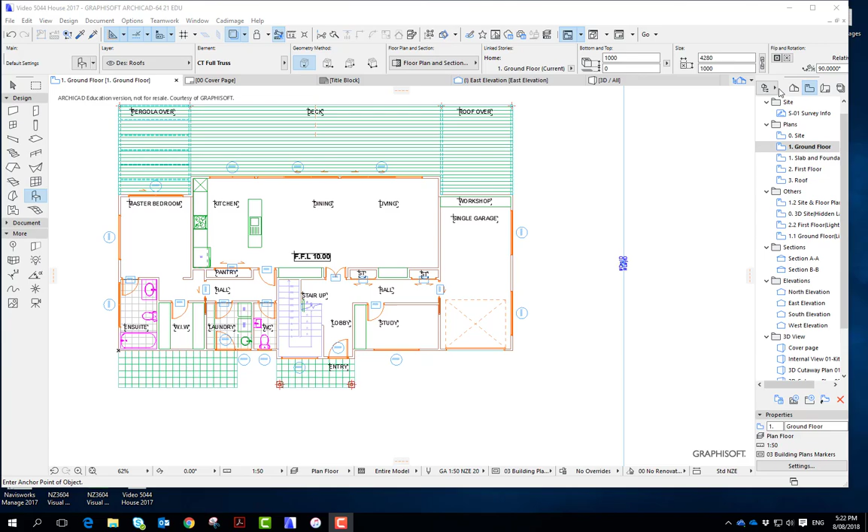So first thing I'm going to do is go up to this project chooser and say show me the organizer. I think this is quite a useful dialog to look at. What's helpful is to put the project map on the left here and go to the views and this one. Now there's already some views in here, so I'm going to just delete them.

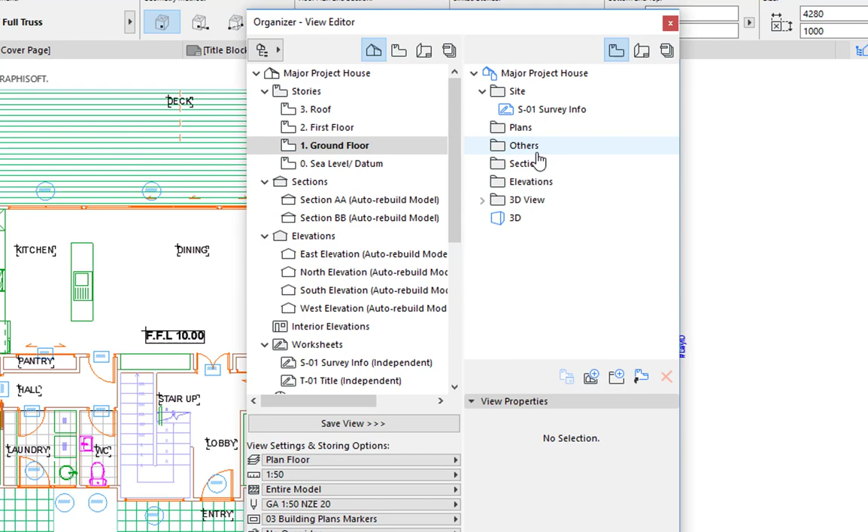As I said to many other students, you're not deleting anything that you've modeled, you're just deleting photocopies or photos that you've taken of the model. So this does not do any harm, and I'm going to do it just to leave a blank template for us to populate with our views.

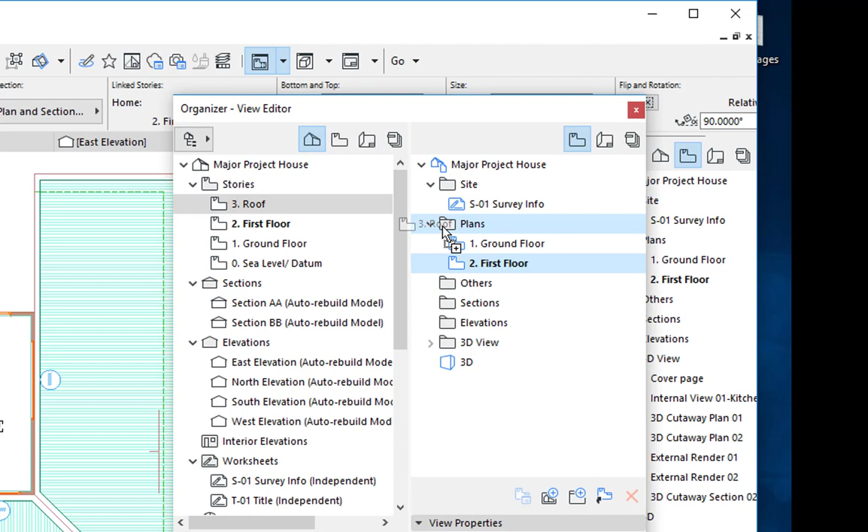So once you've done that, we've got our ground floors, we've got our first floor. You can see this guy has got various things on here, turn the trace reference off, so looks like the drawings are quite good. So I'm just going to grab the ground floor and put it into that plans folder. I'm going to grab the first floor, put it into the plans folder, and you can do the same with the roof and whatever other ones you may have drawn information on.

We've got sections here, so there looks to be some data. Yeah, these are quite good sections, so let's just go and put these into the folder that is allocated. And without checking the elevations, I'm just going to go and do the same thing, put them in this folder.

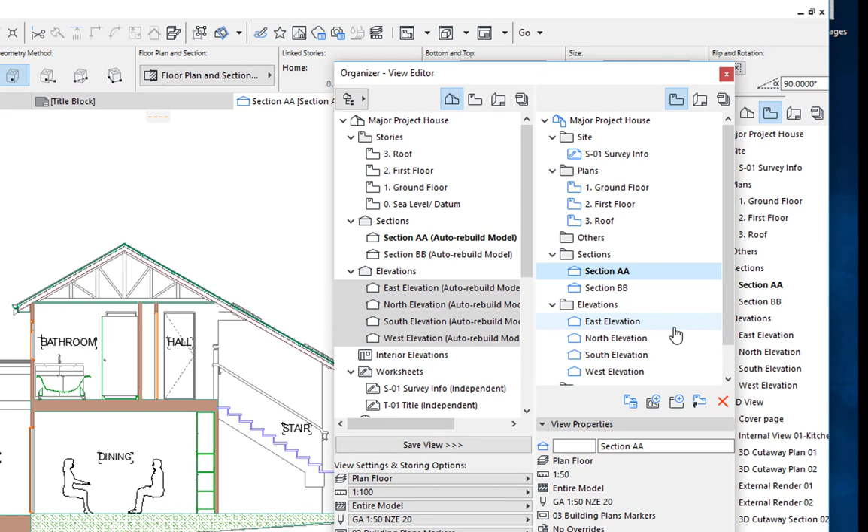So it's quite a good idea to put folders because you can organize your drawings much better. If you want to do that, just go new folder and do that.

The next thing to do would be for me to put in my organizer, I'm going to put the view map on the left and this thing called the layout book on the right. Now this is quite an important one because there's no actual sheets here apart from a cover page, so we're going to ignore that.

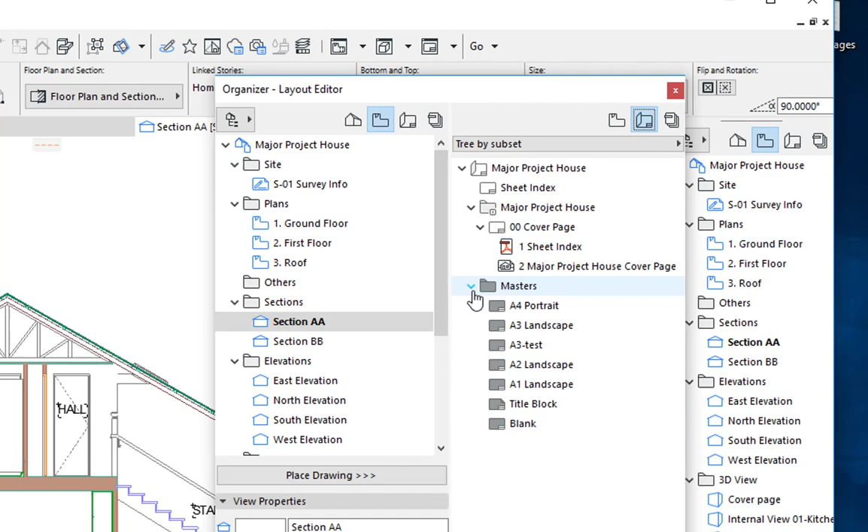But these master layouts are like stationery, they're like templates. They provide the contact details of your office, and normally on a master layout you may provide title blocks and stuff that you don't expect to change, maybe like a logo.

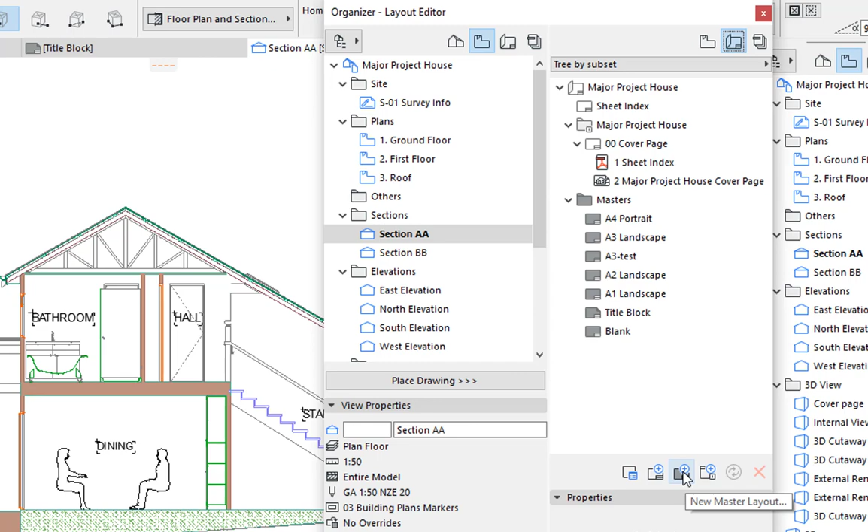So what we're going to do is set up our own master layout. I'm just going to go down to the bottom here and go along to this one in the middle, say new master layout. Click this, you get a new dialog box.

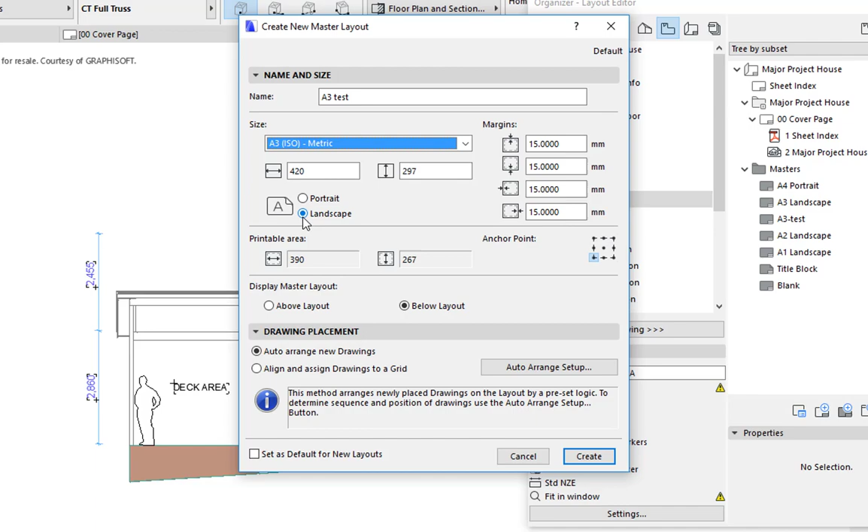I'm just going to call this A3 test. Because it's an A3, we're going to change this to A3. And the reason we're using A3 is that in the courses 5044 and 5045, we print out on A3 paper. I would also suggest you keep it at landscape and don't put this grid on here. Just go create, and you'll see that we've got A3 test created.

You can go in there and put things in it like a title block. So if I go over to this document and go to the line tool, and I'll move the organizer out of the way a little bit, you could go and put in a rectangle. And just be aware how much space you want to leave.

I'm going to select all those lines because I don't want them to be dashed lines. And then I could put in another little square for drawing number over here and something over here for logo, office logo, and you could put other ones in here for project title, etc.

Date, scale - don't go overboard, it's only for presentation drawings. Once you've done that, it will remain on our master layout. I've done this quickly, so you can see I've left a gap here, but you guys should take more care.

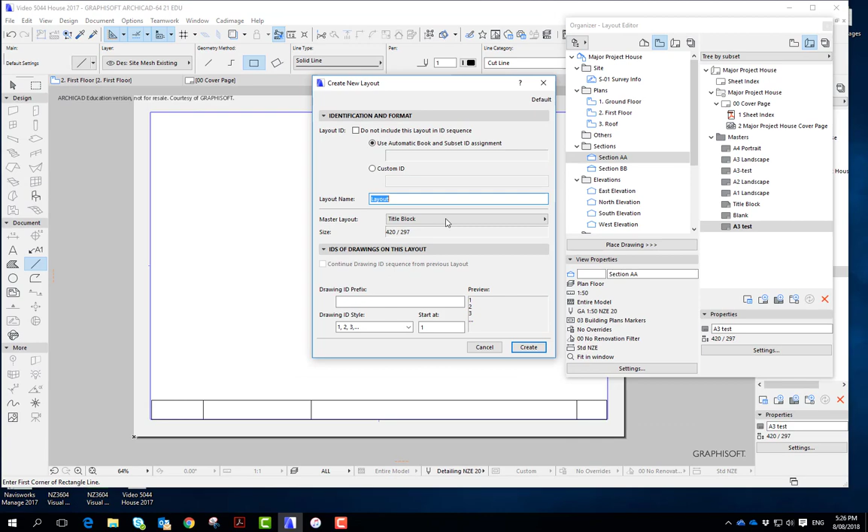So what we're going to do now is create a layout to put one of our drawings on. We go to this button, second from the left, new layout, and I'll say ground floor plan. Master layout is not title block, I'll say A3 test, which I hope is the one that I created. You can see in red the title block information and placeholders that I prepared.

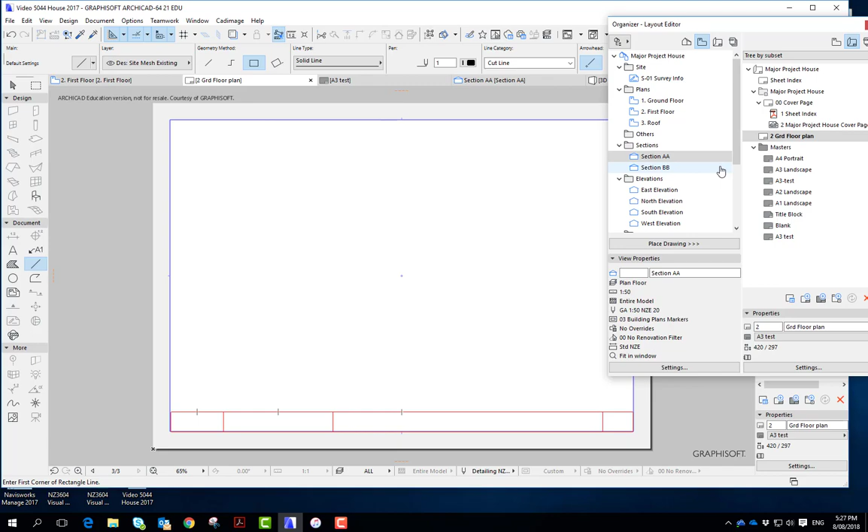So how do I put a drawing on it? There's my ground floor plan layout. I'm just going to grab the ground floor plan on the left and drag it onto that sheet.

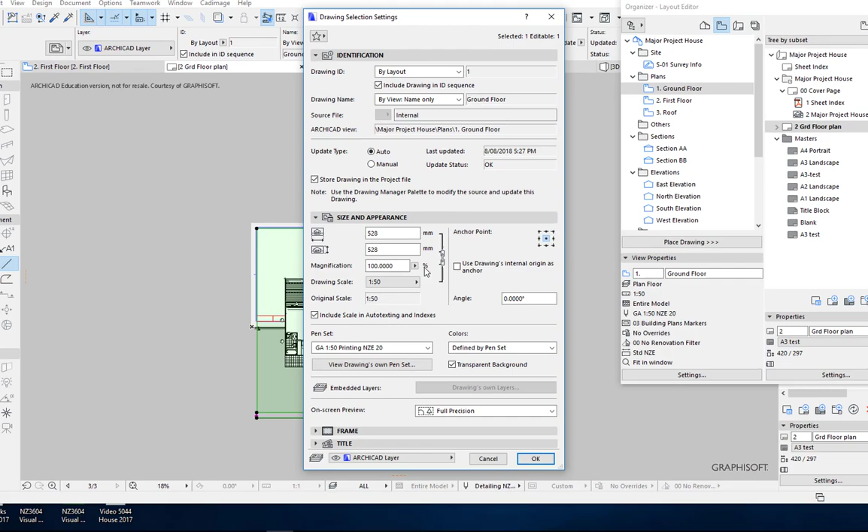And if it doesn't fit on, we can just zoom out, grab the drawing, click up here, and change the scale. I'll change the scale to 1 to 100, and hopefully I can then zoom back in again. Because it's still selected, I'll go Control D and drag it into the middle.

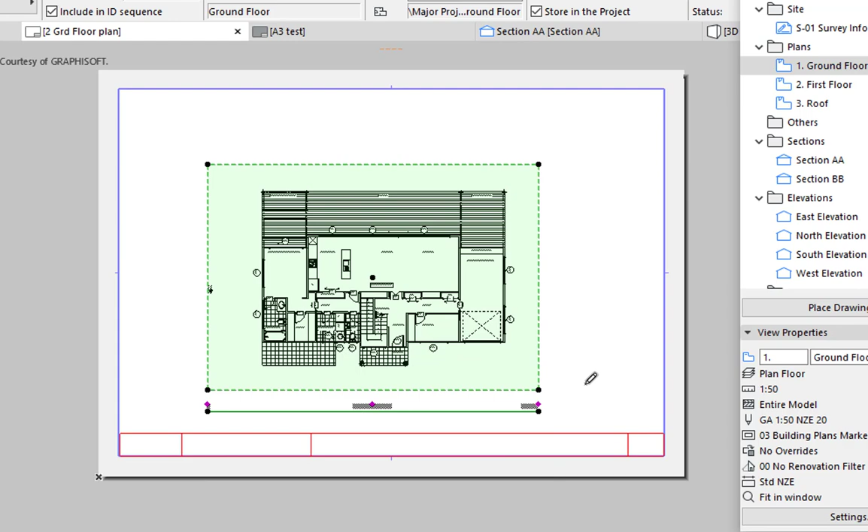Now it's clashing with my title block, so it's still selected. I'm going to hold down the left mouse button, go here, and that allows me to adjust the frame. I can bring this up and place it wherever I want on the page. You may not need this title tab here because it'll be on the main drawing title bar, but if you have one or two drawings, you'll want to leave this on.

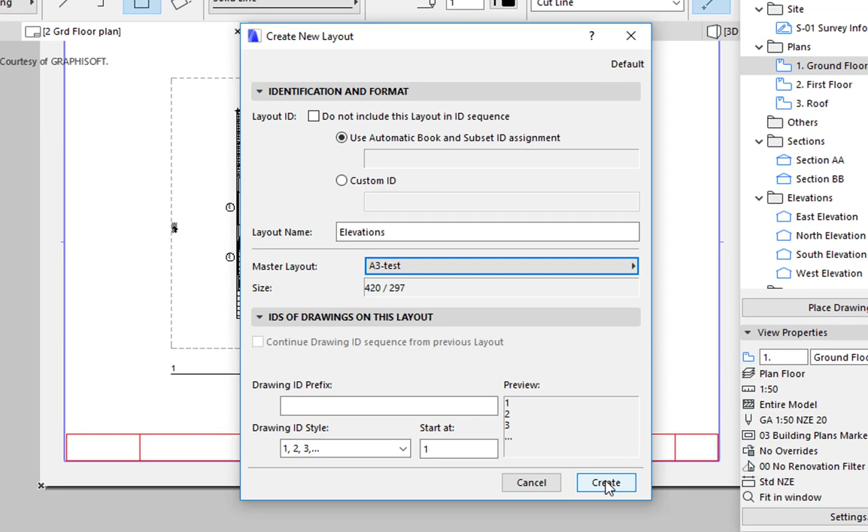Okay, let's do another one. New layout, I'll call it Elevations. I'm going to use the same master layout, which I hope is this one, and I'll say create again. This one I think actually is not the one I want - it's one that's been there previously, so I'll go back to settings and go to the first A3 test one, see, and this is the one I created.

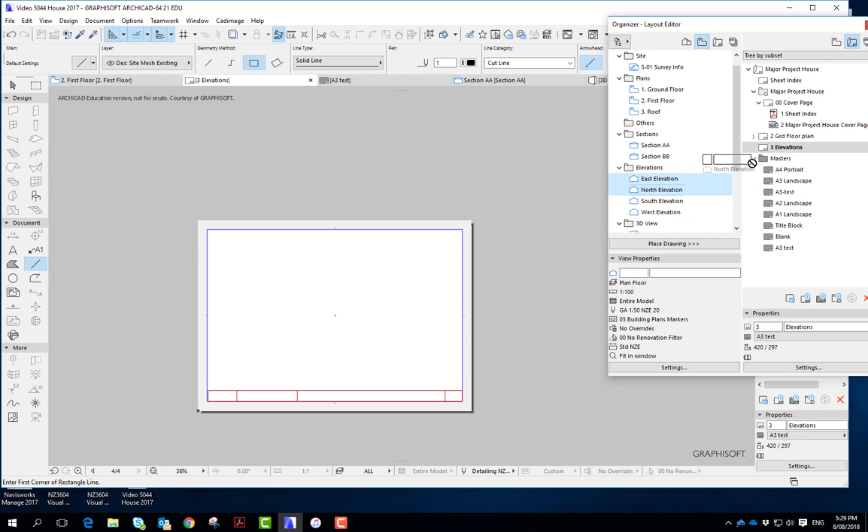All you got to do then is bring over some elevations. So I'm going to grab two elevations - I'll do that one, control click here, and put it onto that sheet. Wait for the sheet to update and we'll see what size they are. They could be quite... oh, they're quite okay.

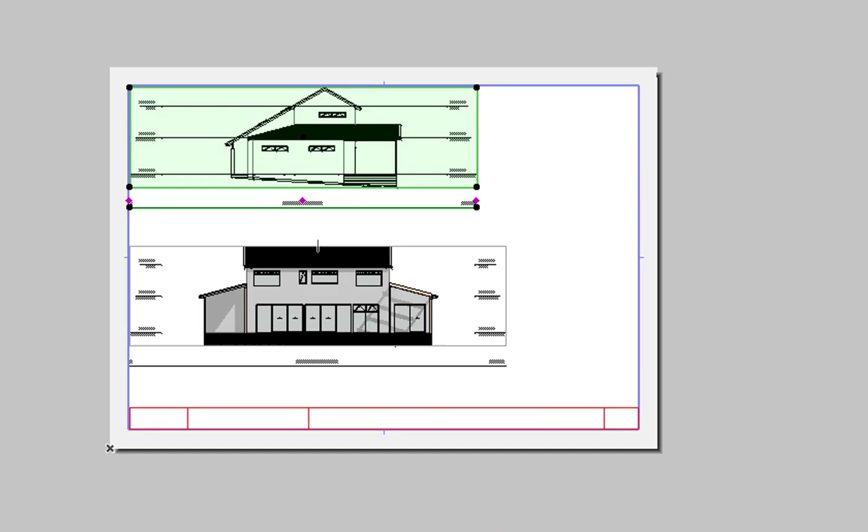So this one, I highlight it, go Control T, and you can see the scale is 1 to 100, that's fine. I'm now going to zoom in and make these drawings sit better on the page. I've selected this one, I'll drag it and put it somewhere central. Then this one, I select, drag it and put it central in the bottom half of the page.

You can see here that the frame is really close to the ridge, so I've got the drawing selected, and I'm going to adjust the frame. And that's how you do it - selecting the drawings, Control T, we can change the scale as you saw already. Depending on what size you do the drawings, you can fit more on a page or less. So that's basically how it works.